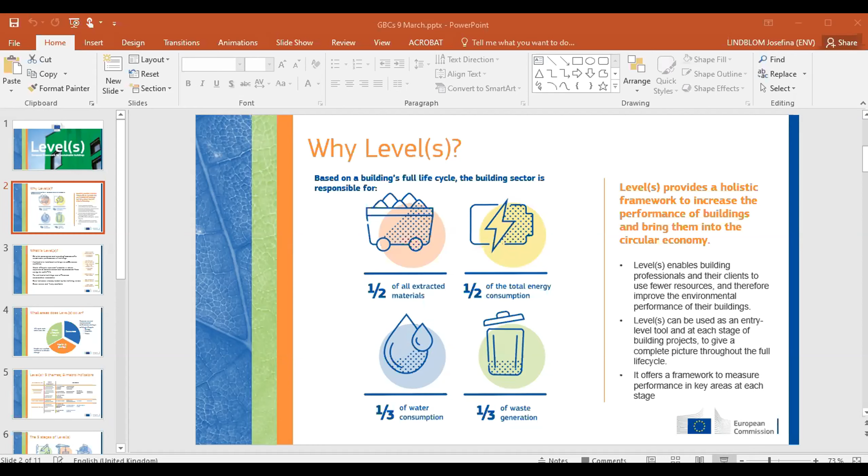Let's see, I probably need to get out and manually click my way forward. We now see your next slide, yes. What is levels, you see now, yeah? Yes indeed, yes. Okay good, so there we go.

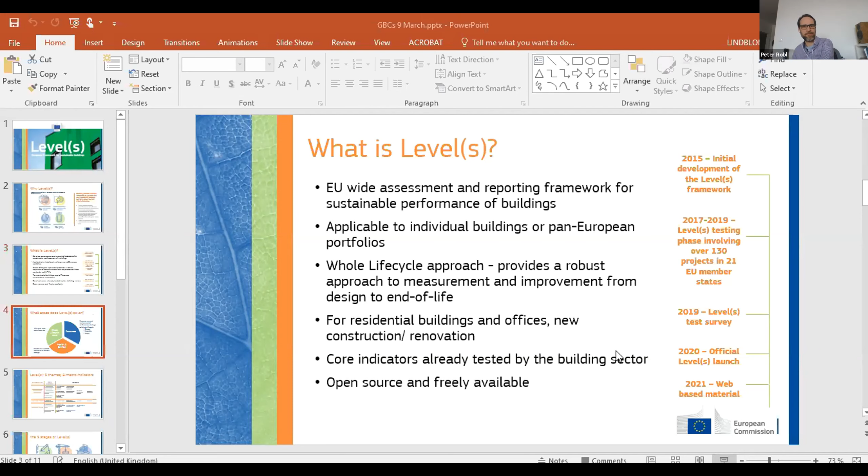Do you now see a different screen? No? Okay, yeah, I really need to go out each time and change it for some reason. Okay, so I'll continue to do so.

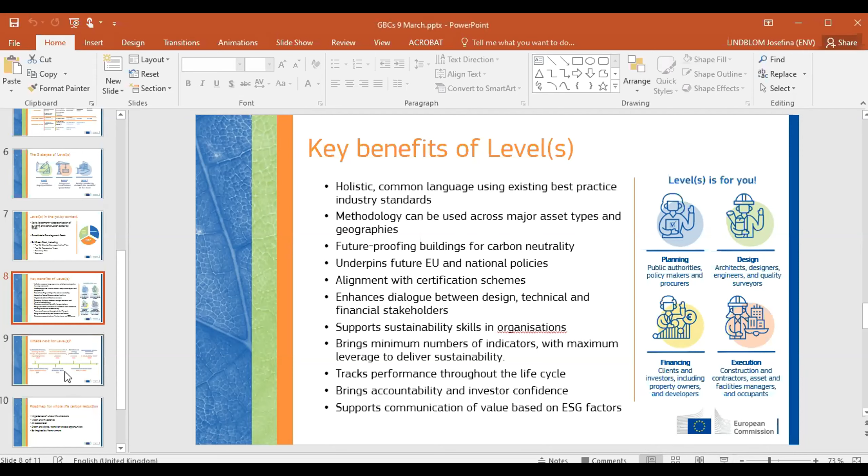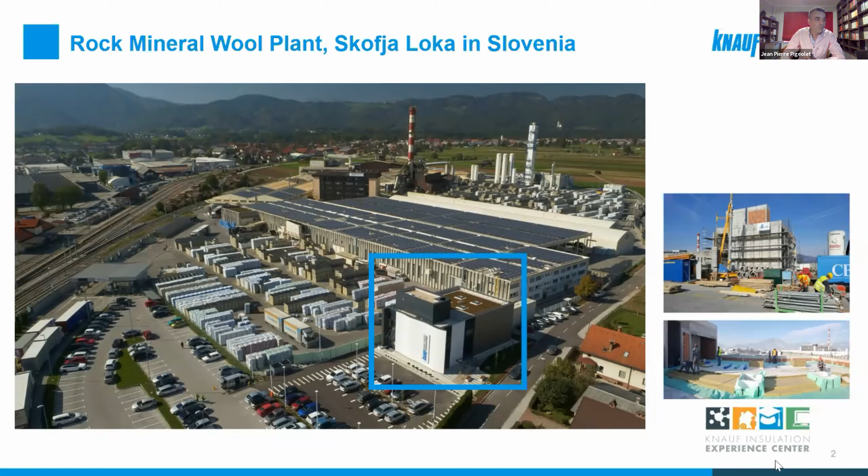This building is now used for experience and demonstration, and also for social events, so the neighborhood people can use the building for some social events. In this building, on the first floor, we have some conference rooms that are quite flexible because we can just split the room, we have removable walls. On the ground level, we have what we call the demonstration center, where the customer can play with insulation and learn about the new techniques in insulation systems.

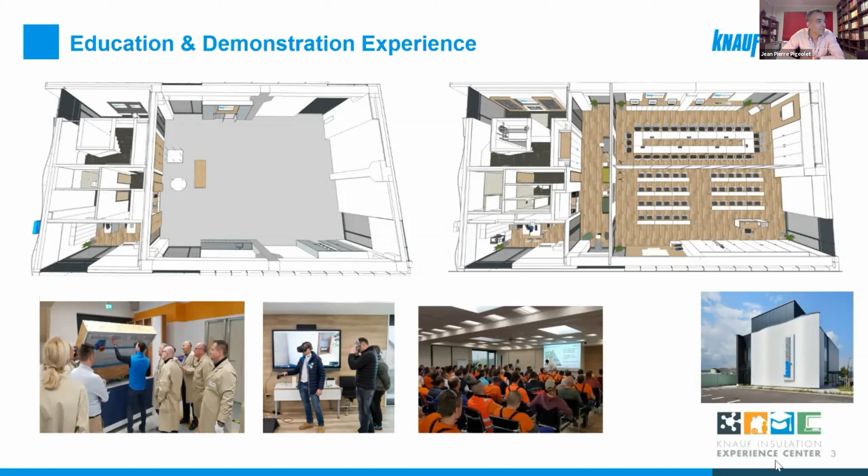So when we decided to construct this building, we really wanted it to be a kind of piece of art in terms of sustainability. We wanted to be sure that we can encompass all the sustainability issues and topics, like thermal comfort, health issues, acoustic, fire prevention, life cycle costing of the building, and also the demolition or deconstruction of the building at the end of life. So how can we be sure that the materials used in the building can be easily segregated and used again at the end of life, in 50 years, for example.

So there was a need for a kind of scheme, a kind of tool that can help us navigate through the sustainability requirements, to be sure that we don't forget any fundamental issue. So we started to think about it at the design phase, and we wanted to be sure that during design, construction, and post-construction, all sustainability aspects have been taken into account. We were asking ourselves that question.

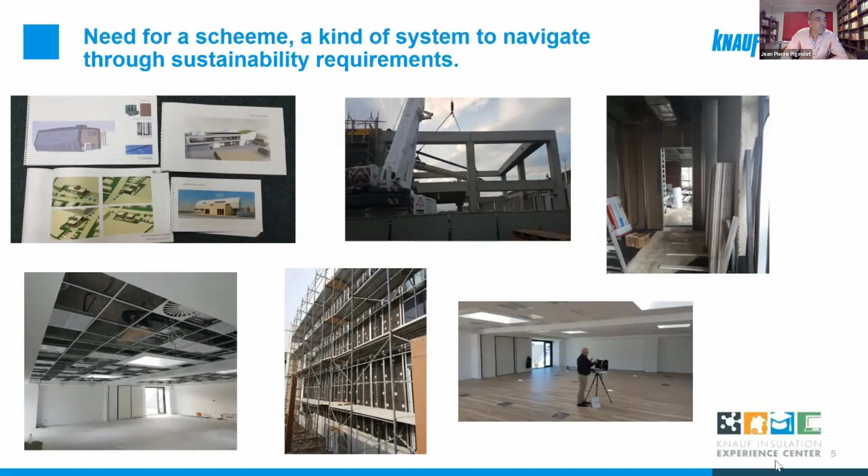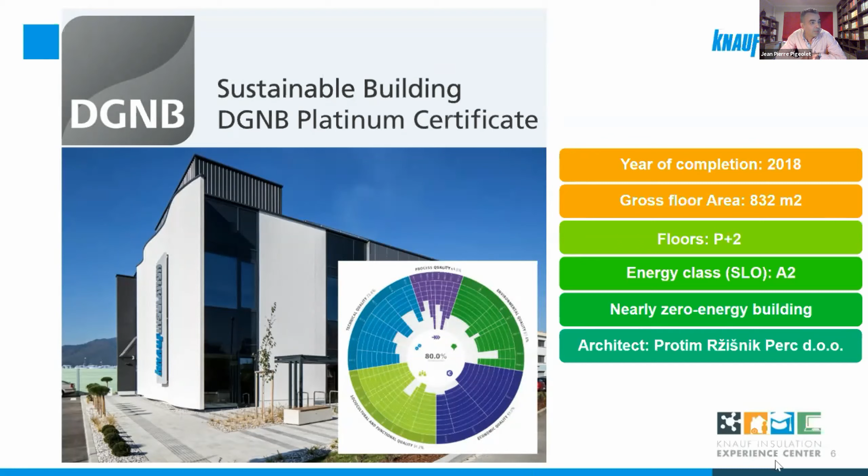And so we decided that time to go for the DGNB certification in order to certify the building through this scheme. DGNB certification is something that has been set up by the German Green Building Council. This is their scheme. You have to go through all the sustainability aspects and topics, and you receive a score for each topic, then at the end a global score. We received 80% for this building, so this is a platinum building, excellent in terms of sustainability.

When we decided to go for this certification, at the same time we saw there was a call for the pilot testing phase, a call for pilot projects from the EU Commission. That was end of 2018. So we decided to apply also for Levels, and to compare at the end what was requested in DGNB and what was requested in Levels. We decided to go for it, and I was part of the team dealing with this project.

As an example, we compared the life cycle assessment of the building. In DGNB, that was 50 years taken into account, and in Levels you have to take into account 60 years, for example. Since then it has been reviewed, I think, to be more compatible. We also had some questions about the carbon footprint of the building, in order, for example, to split the fossil origin of the carbon and the biogenic carbon in the building coming from wood infrastructure. That was something requested in Levels, but not in DGNB.

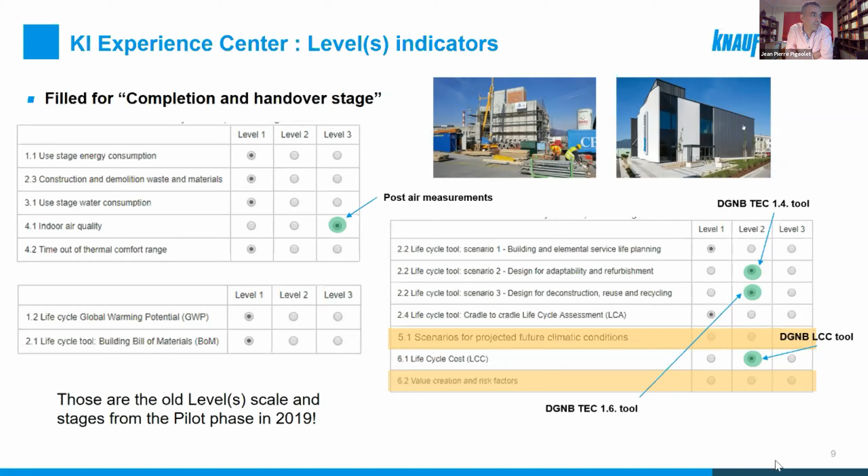And so that brings us to the conclusion that we got very high similarities between this certification scheme, DGNB, and the levels tool. So again, levels is not a certification scheme, so you don't receive any points into levels. It's a tool to guide you, but it's not a certification scheme. And as I said, a lot of the DGNB tools were really helpful to comply with levels requirements.

Then when we finalized this pilot phase, we had to submit the Excel file I was talking about to the EU Commission, to the Joint Research Center, and they analyzed all the Excel files that were coming from the 82 testers that finalized the levels pilot phase. Then with all those comments and results, they updated levels through a new version, so levels version 1, that has been published in January 2021.

In order to communicate also about the results we got after this pilot phase, we organized a conference in this Knauf Insulation Experience Center in Slovenia in September 2019.

During that conference, we invited people from the Slovenian government, because something I forgot to mention is that we involved directly the Slovenian authorities, because we selected DGNB as the rating system for our building, since in Slovenia you don't have a national rating system existing. The Slovenian government was really interested to capitalize on levels and on the results of our project in order to develop a rating system for Slovenia that is based on levels.

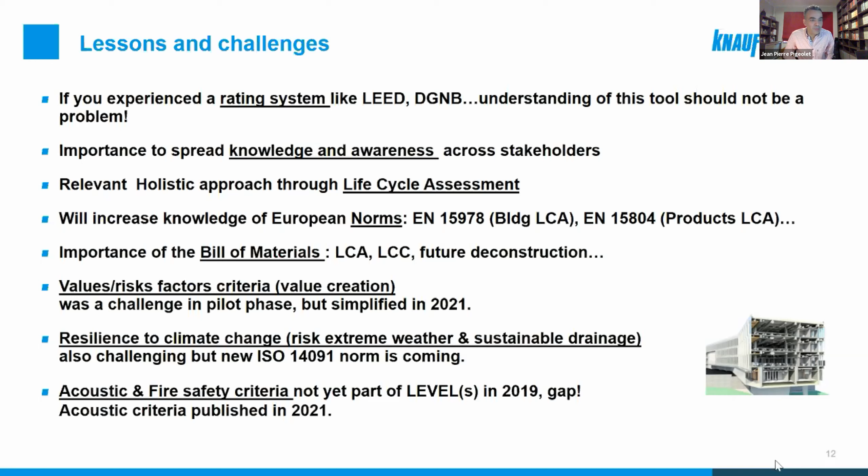And just one is still missing, the fire safety criteria. So I did not see anything about that in Levels, unfortunately. Then it's more for the panel discussion, maybe at the end of the presentation. But what will be the future of Levels?

So now all the governments and private organizations will use Levels. Is it going to be a kind of tool for construction permit authorization? For example, for a big project, if you don't apply Levels, we don't give you your permit for construction. Is it going to be a support for green public procurement, or a tool for financial incentives, also for subsidies? So if you don't apply Levels, for example, you cannot get some subsidies from the government for green energy, insulation, or things like that.

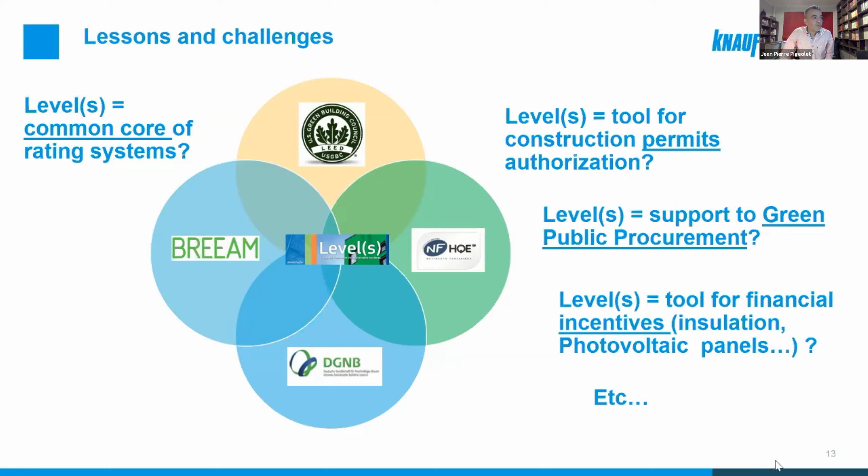So it's a little bit open to all governments and private organizations. And then about Levels in relation to the building rating systems that exist today - is it going to be the core of the rating system? I think it's going to be a little bit like that, because there was a call for proposals.

This LIFE framework - so the EU Commission requested some projects about Levels in order to better understand it. And 8 Green Building Councils in Europe - from France, Spain, the Dutch Green Building Council, Germany, DGNB, and so on - joined forces to better understand Levels and to be more in line with it. Into this LIFE Levels project, which will run for 3 years, they will focus on life cycle assessment, life cycle costing, and indoor air quality, in order to apply the same metrics for those 3 criteria, because this is something very important into Levels.

They want everybody in Europe to use the same metrics for the criteria in order to compare buildings. So this is really the objective of Levels - to get good benchmarks and to have the possibility to compare buildings.

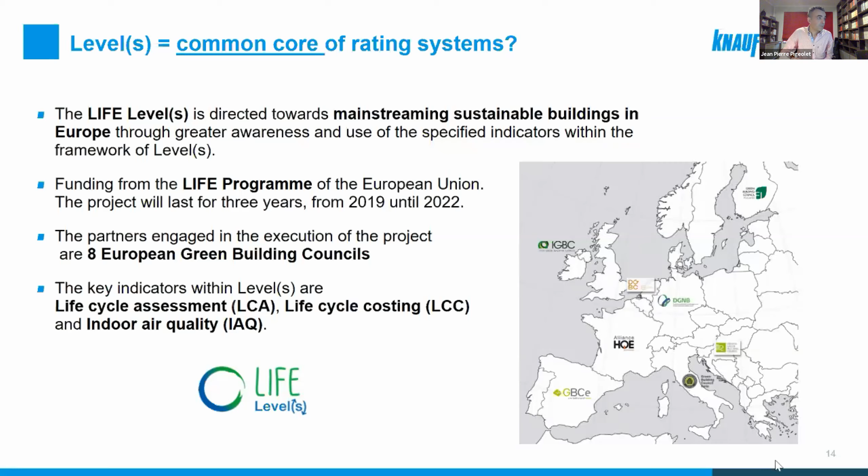So this is my last slide. I guess you all know about the Energy Performance Building Directive that is applied today in Europe, where you have several levels of energy efficiency of the building. I'm really confident that in the future, Levels will help also to go in the direction of a sustainable performance building directive. That means that next to energy efficiency, we have also to think about the health of the occupant, the comfort, the end of life of the building in terms of deconstruction and reuse of materials, and also the whole carbon footprint of the building.

So this is the end of my presentation, and I will be happy to answer your questions after the presentations.

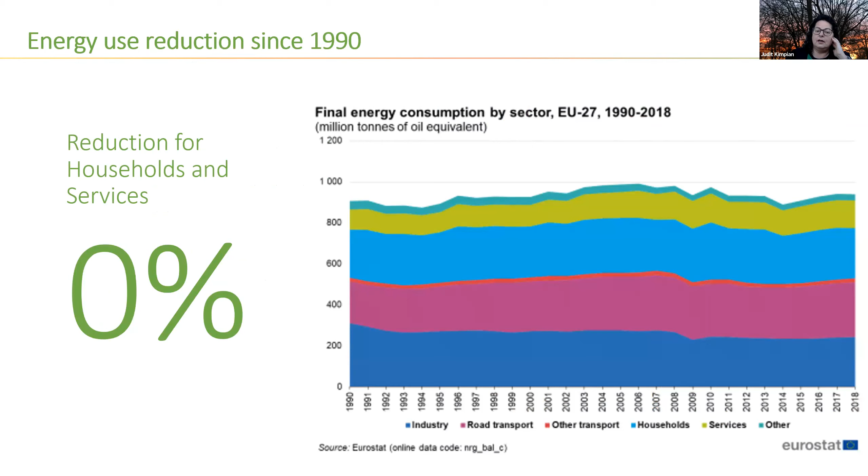And the reason why we are facing this emergency is actually, when you look at energy use reduction since the 1990s, the graph really speaks for itself. We have not managed to curb even our energy consumption, and in terms of our material use and broader environmental impact, we are edging closer and closer to irreversible damage.

As I said, we're really not in the same place. There's a realization that we need leaps and not piecemeal action.

Professional organizations are taking a leading role now. Architects themselves are recognizing their huge influence and have led many leading initiatives, some of which have become influential cross-industry movements. And all of them want to see real, tangible, measurable change that we can work with.

The COVID-19 pandemic has given a massive adrenaline injection to the climate movement, really strengthening calls for a much greater emphasis on green public realm and highlighting the need to transform city centers into healthier, greener neighborhoods. The green urban grids are seen as arteries for safer, healthier transport and urban renewal.

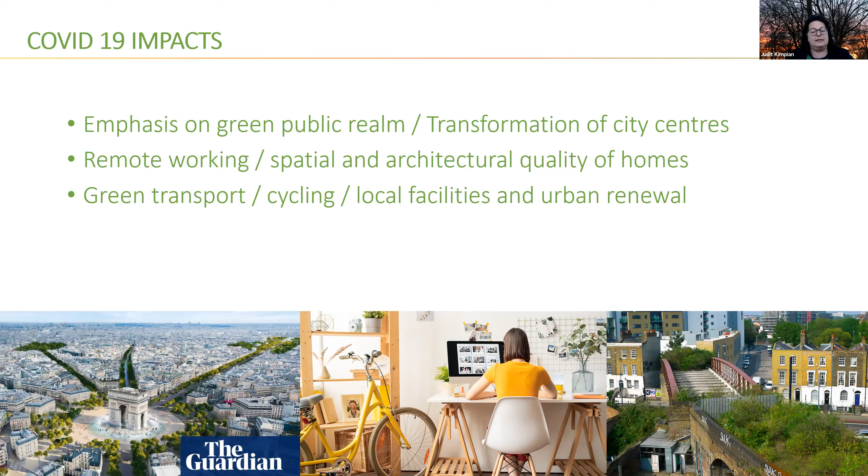And remote working has brought into very sharp focus the inequality in the spatial and architectural quality of homes and buildings, and the impact of that on health and well-being. COVID has also exposed the fragility of certain building types and the resilience of others.

For example, buildings that have stood the test of these difficult times have been those that offered operable facades, greater adaptability between home, office, and retail functions, taller floor-to-ceiling heights, narrower floor plates, greater mass, really challenging the prevailing investment models that predominantly favor a shorter lifespan

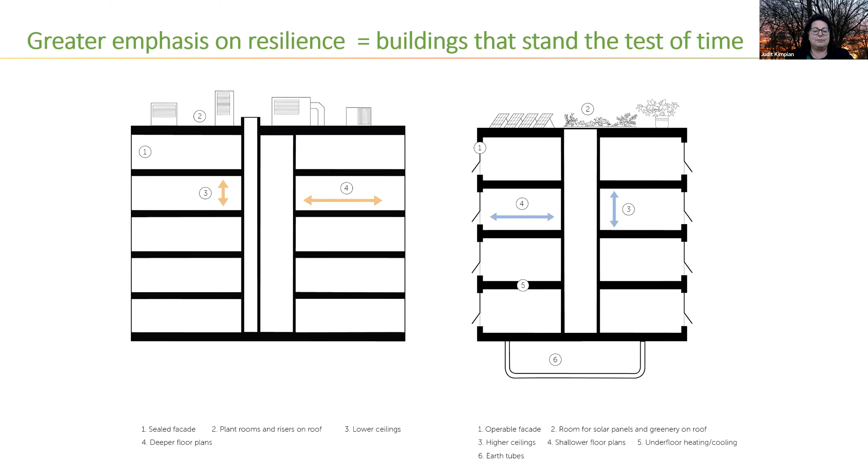typology. So whether existing or new, the importance of high quality architecture and public realm has been championed by the German Baukultur Foundation. Its influence has grown so much that Ursula von der Leyen has put the new European Bauhaus at the heart of the EU Green Deal and the Green Recovery Fund, each totaling over 1 trillion euros.

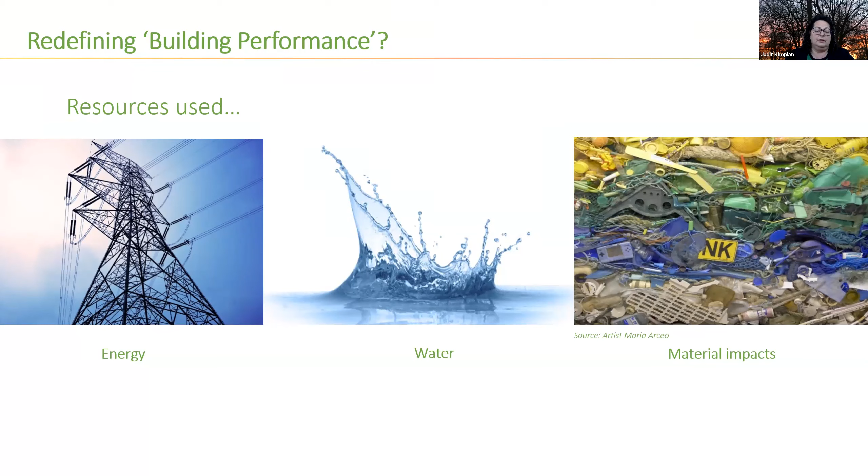So, as we are increasingly accounting for these long-term aspects of performance, we no longer count energy only. And to support more holistic decision-making, we are really taking into account the environmental impact of all the natural resources used, and scrutinize what it is that we achieve with them, at least in terms of comfort and well-being, climate change resilience, and capital and whole life cost value.

And this is the framework that Levels really captures so well, and why the Architects' Council has seized this framework as such a valuable asset. And we want to do this over a building's lifespan.

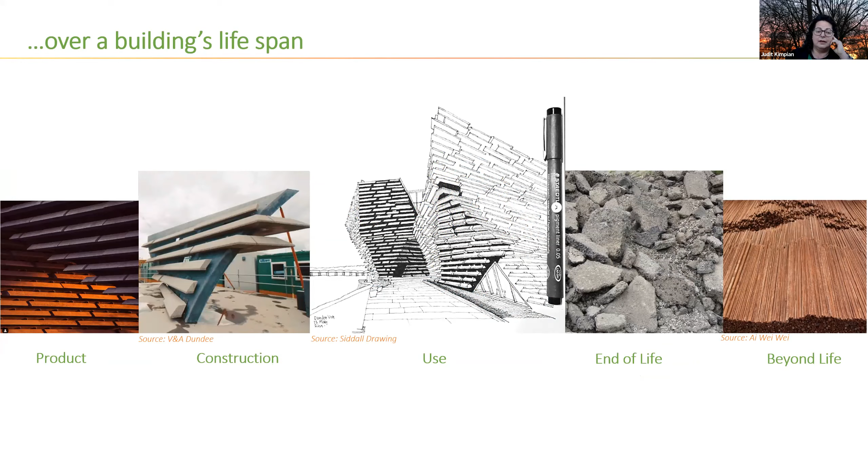So we really want to stop pushing impacts further along a building's life. We want to make sure that we account for these impacts over the entire lifespan, from product to construction to use, to end of life. And Levels is really the first EU reporting framework that looks at building performance from this holistic perspective.

We think that it is a game-changing program that, in our view, should really underpin all policy incentives relating to the sustainable built environment. We really need such a framework so that we stop pushing these impacts downstream, and also to enable designers to better balance these multiple and, frankly, often conflicting factors.

So, for example, architects are never in favor of doing more accounting, but actually we're not alien to scheduling. We do like to schedule things that really make sense to do so.

In this case, what we have not been able to do in the past is balance these different conflicting drivers through design. For example, lower floor-to-floor heights help reduce heating loads due to a more compact form. They also reduce embodied carbon, but they increase overheating risk, and higher ceilings increase the perception of available space. There are multitude of such considerations that designers face day in, day out. Making them more explicit means the pros and cons can be meaningfully evaluated for a specific project.

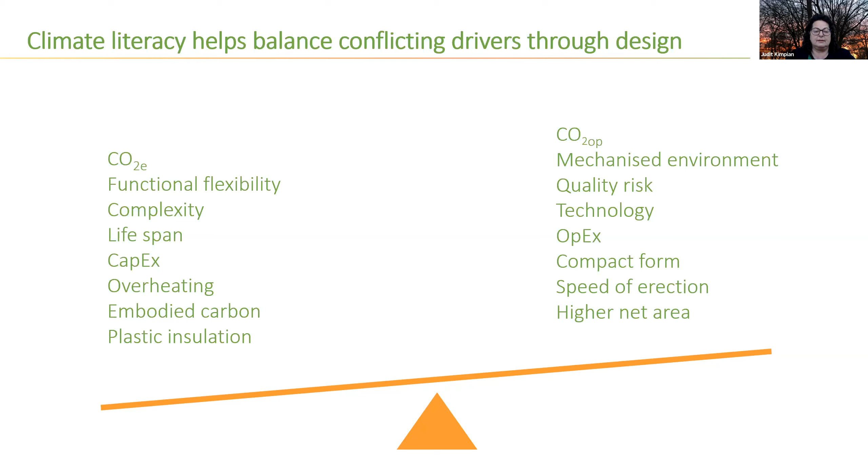What's even more important about Levels is that it recognizes the importance of accountability through data by allowing comparisons of expectations and outcomes. This is a new feature that has not so far featured in EU legislation. We have a tradition to compare theoretical performance and not really harmonize it, not make it comparable with on-the-road performance, as we know well from the car industry. To make real-term improvements, we have to start measuring real-life performance and not just lab figures.

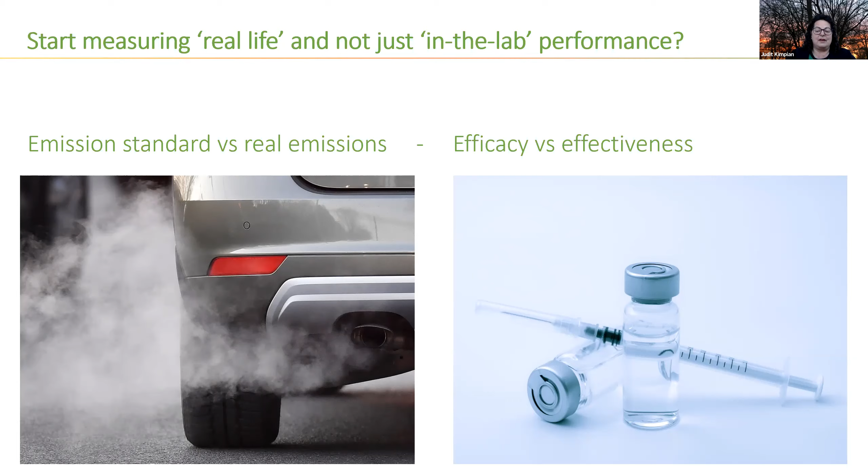As we have come to recognize terms like efficacy versus effectiveness, emission standards versus real driving emissions, these can hide very important differences in assumptions. By targeting real performance, we can begin to align the fragmented supply chain in the construction sector. These interests have to then work together towards shared goals and stop value engineering aspects of design that undermine whole life performance.

In fact, after operational carbon, the lifespan of elements is the biggest factor in achieving net zero goals. Take a look at this chart. Over a 100-year lifespan, a building that has a 15-year lifespan, which is not uncommon in major cities, has to be replaced over 6 times. So lifespan is also a major driver for architectural quality.

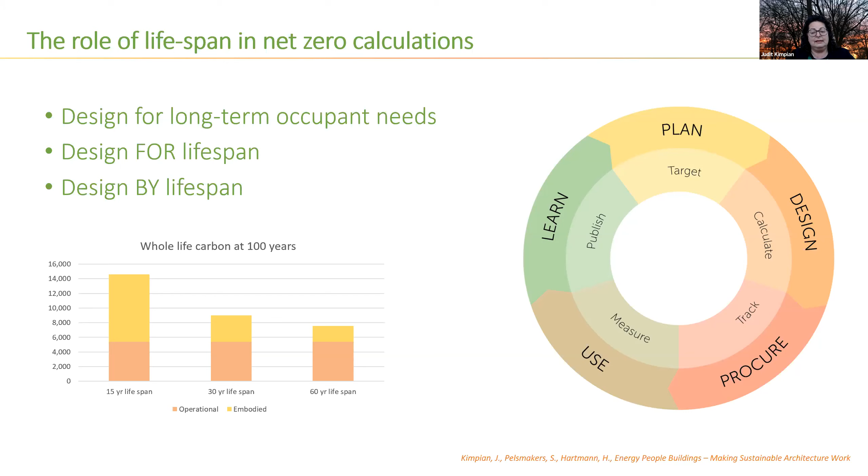Aiming for a longer lifespan also highlights the need to design for people, to build a better understanding of how people interact with buildings and what makes buildings last. One of the most startling lessons learned from the Building Performance Evaluation program is that buildings break down when they are not meeting occupant needs through poor interface design.

Having the right data structure and tracking the right metrics from the start is absolutely key to making the construction process and delivering sustainability in practice more accountable. Gathering feedback from occupants on how the design met their needs and expectations could be seen as risky to start with, but in fact it is this deep insight gained from feedback that adds the rigor to research that accelerates innovation.

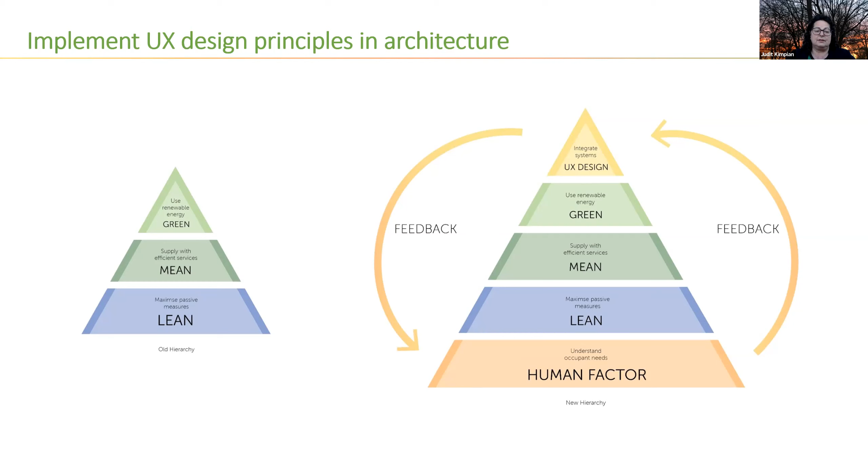The most exasperating thing is how difficult it still is to find case studies with performance data and architectural merit. It seemed as if the two approaches lived in separate realms. Buildings would either be able to use minimal energy and have excellent embodied carbon metrics, or be beautifully designed.

But using the Levels reporting framework, it will hopefully facilitate more of these types of contracts, leading to even longer lifespan of buildings. In fact, as you see, such buildings are possible to find, but it is just challenging for architects to design with these metrics. So the reason why we need Levels is to make these metrics more explicit and easier to design with.

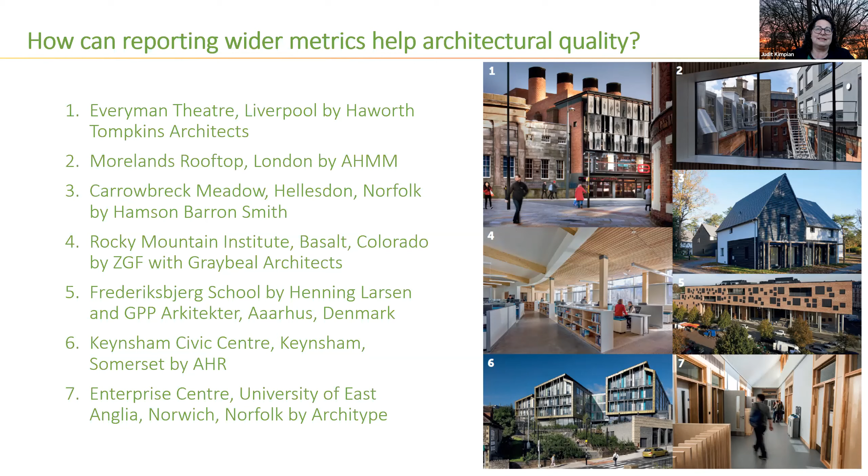To architects, it seems that the elephant in the room is architecture. A building's spatial and material configuration has a huge impact on whole life performance, and high quality architecture adds more value to a building than performative measures on their own ever will. Yet it's very hard to argue for architectural measures to be retained in the face of value engineering, even if they extend the lifespan, adaptability, and usability of buildings. So we hope that using Levels and this emphasis on the lifespan of buildings will actually ultimately put a much greater emphasis on architectural quality.

Meanwhile, to the wider sector, it's architectural education that's the elephant in the room, and many call for improved climate literacy in design. Perhaps the actual elephant in the room is feedback, to introduce greater accountability for performance and enable high quality architecture that truly stands the test of time.

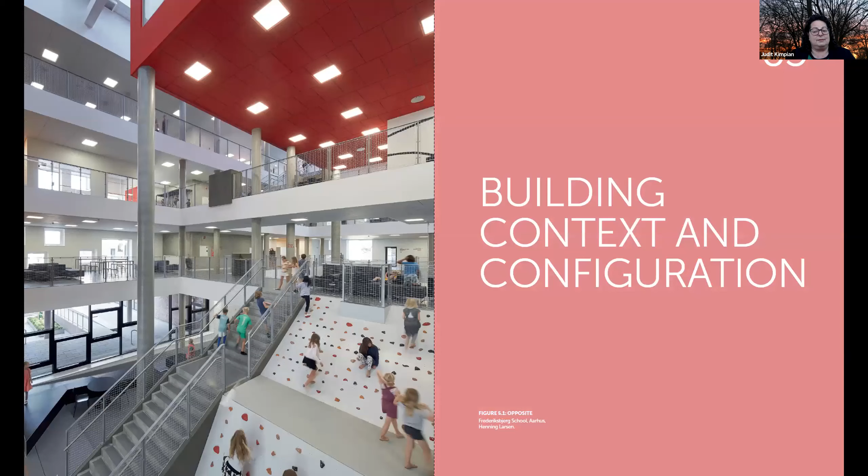I was very lucky to have been able to work in architectural practice, policy, and research over the past decades, and I'm really pleased to have been able to set out this approach in this recently published book, where we describe what feedback is and how it leads to innovation in design through case studies that showcase both inspiring design and impressive performance. And Level(s) is critical to deliver both.

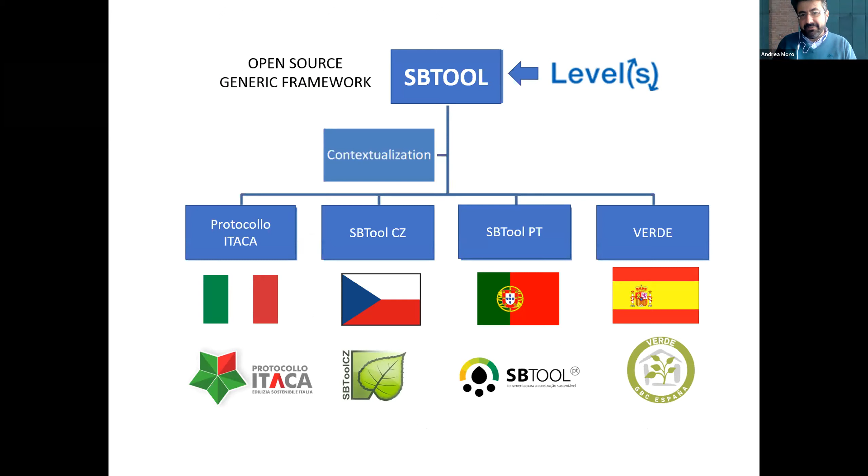So a step back to policies. As already said, we have several international, transnational policies and initiatives, both at global level, like the Agenda 2030 and the Sustainable Development Goals, and we have also European, very important policies like the European Green Deal that contain the circular economy approach or the innovation wave and so on, and also the Paris Agreement. So all those policies call for national, regional, local policies and actions.

So public authorities, and I'm talking about national governments, regions, municipalities, they need to set sustainability targets in different policy instruments like strategies, action plans, regulation, green public procurement, laws, funding programs, building codes. So there are many, many different ways to mainstream the goals that are set at global level into local actions. And they need to set targets in policies and action plans that are measurable, reliable, and verifiable. So public authorities need indicators, they need assessment systems to set and verify the achievement of the sustainability targets set in their policies.

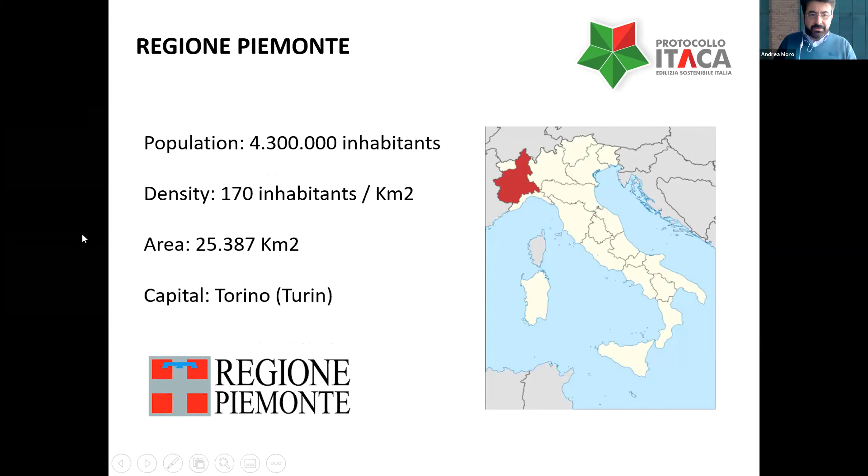The first policy was a funding program for social housing, 10,000 apartments by 2012, 700 million euro. For the first time, the region decided to set a minimum acceptable score concerning the sustainability of buildings to make them eligible in the funding program. So all the social housing agencies and public construction companies participating had to prove to the region they reached the minimum performance score requested, using the Protocollo Itaca system. They were also allowed to receive an incentive, an extra funding of 10,000 euro per apartment. The use of Protocollo Itaca has been very useful to fix measurable targets in the funding program for the eligibility of buildings.

Another example is a recent law from 2018 concerning urban regeneration and the limitation of soil consumption. There are incentives for the renovation of the building stock, the use of recycled materials, and the improvement of land permeability. Also here there is a minimum sustainability score requested, and the incentive is not extra funding - you can increase the volume of your original building by a certain percentage. Again, the assessment system has been useful to fix a measurable target in the policy.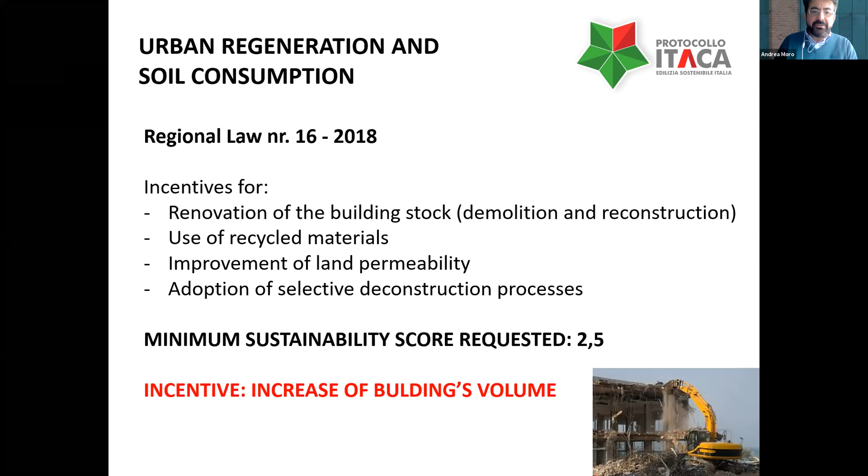These applications of Protocollo Itaca are not only addressing the public sector. There is a regional decree coming in 2013 that made the Protocollo Itaca certification mandatory for big shopping centers - the ones with a surface bigger than 4,500 square meters. This certification is mandatory to receive the commercial authorization, meaning the authorization to open the shopping center. And the threshold was quite high, because 3 points on Protocollo Itaca means a best practice shopping center.

Today we have 30 shopping centers certified, of course belonging to the big brands like Decathlon, IKEA, and others. So in this way, it was possible for the region to control the quality of shopping centers realized in the territory.

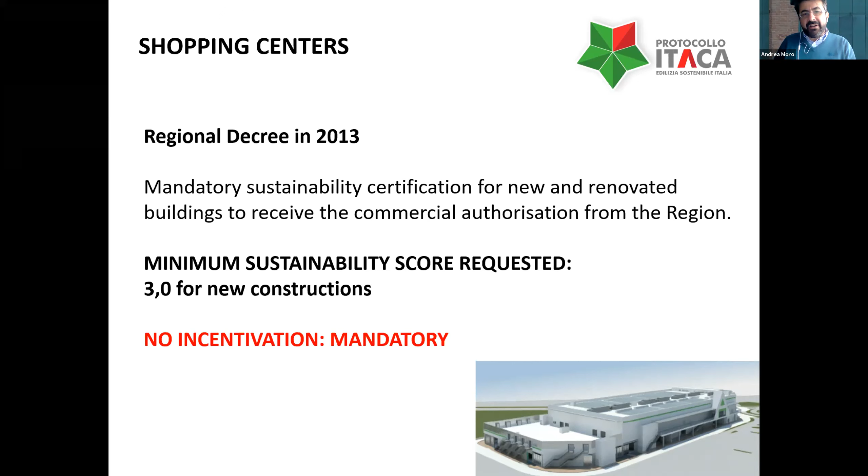Another very important application concerns structural funds for regional development, not only in Piemonte but also in the Calabria region, in south Italy. In this case, Protocollo Itaca was used in the funding program for the renovation of public buildings for giving extra scores in the ranking list. Municipalities present the demand for funding for the renovation of public buildings like schools, offices, etc., and they have to provide several pieces of information, including an estimation of the sustainability reached by the renovated building after the intervention, estimated with Protocollo Itaca.

The estimated score will give additional scores in the ranking list, because not all the interventions will be selected by the region - the more sustainable you are, the more chances you have to be selected. Then the public authority, the municipalities, must certify the building with Protocollo Itaca, and they must prove to the region that they have reached the estimated score.

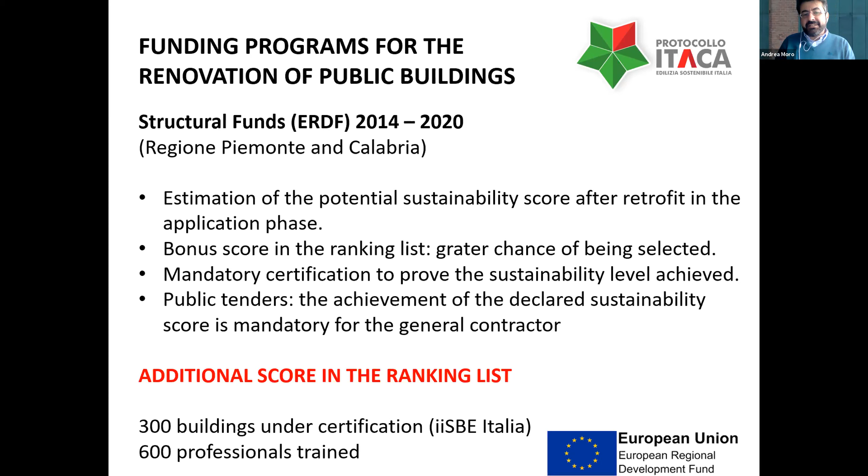And all this comes into green public procurement, because once the public authority selects a design team and a construction company, those designers and the company must reach the minimum performance declared during the presentation of the application. We have 300 buildings under certification, with a huge impact, because there was also mandatory training for professionals to present the estimation of the sustainability score. So you can see how big the impact of such applications could be.

Finally, another example is the use of an assessment system in green public procurement. This is the case of a building in Torino, where Protocollo Itaca was used during the bidding and tendering process. The general contractor who won the process had the mandatory requirement to achieve the minimum performance score with Protocollo Itaca, and there was a penalty of 5% of the value of the building if the score was not achieved.

So we have different governmental levels, ranging from global to EU to national to regional to municipal. Each governmental level is dealing with different policy instruments and actions.

We need to coordinate policies and actions for what it concerns the setup of targets. So it is necessary that a common core of indicators is shared, that we use the same metrics to fix targets and to report. Because we have global targets, but actions are taken locally at municipal territorial level. But we need to report the result of local action to the global level to see how much we are progressing toward SDGs, toward the targets of the Green Deal. So it's really necessary to have a common set of indicators shared at all governmental levels.